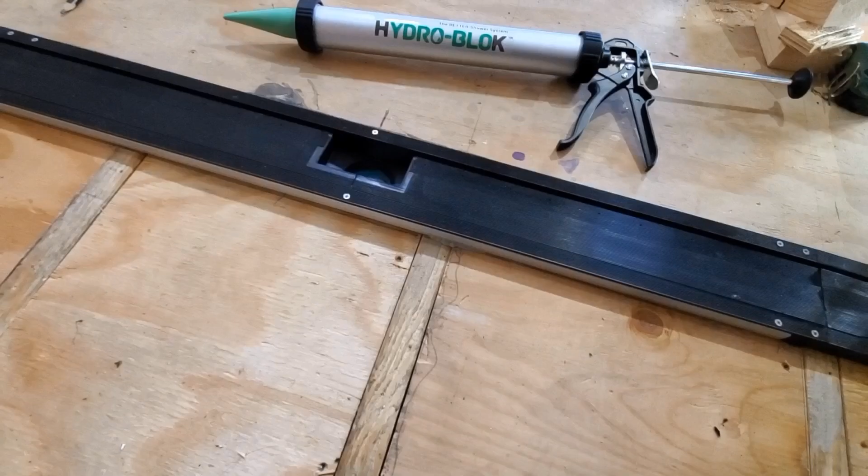So let's start by saying that we want to have a curbless shower, and that's why we want to get in touch with them, and they're going to send us all the parts and all the products that we need. Now let's start with the drain system. You're going to have these small foam covers that are going to help you for the drain system, and I'm going to go over that in a moment. But you have the main drain body right there, and obviously all the parts that will come with them.

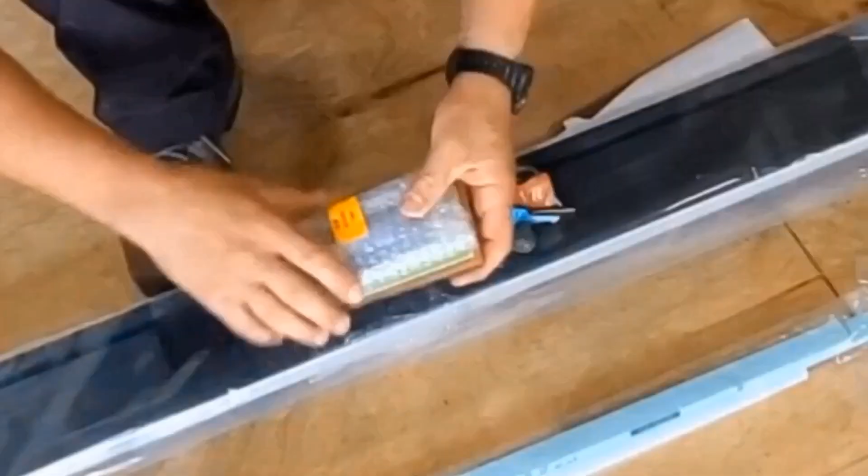Now I like to work on clean surfaces so I can keep track of all the parts that I have, like this puller over here. This is the drain cover puller, and it comes with a template. So these parts are going to be assembled later on the main drain body, and you have a template, so you can actually stick it on top of a tile, cut around, and it will fit perfectly inside that cover.

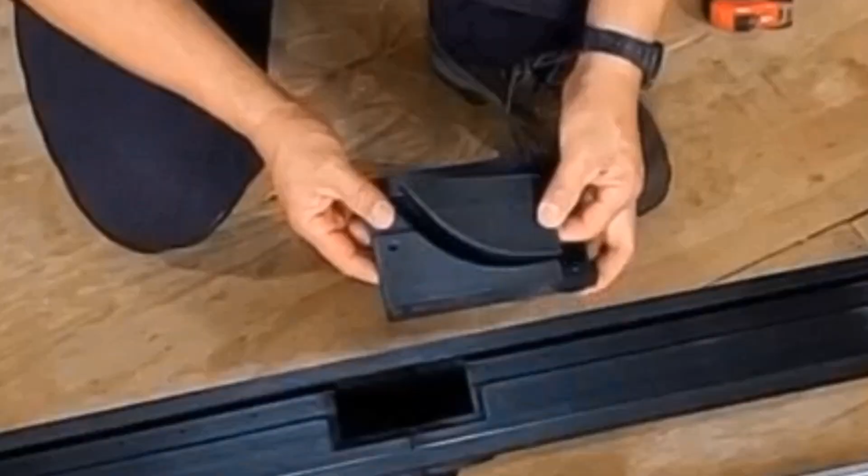You also have the end caps. You're going to have one on the right, one on the left. They are not identical. They are actually designed for each end, so you will follow the pattern, the grooves that you see on your drain. And that's an important part that we're going to go over and assemble later on.

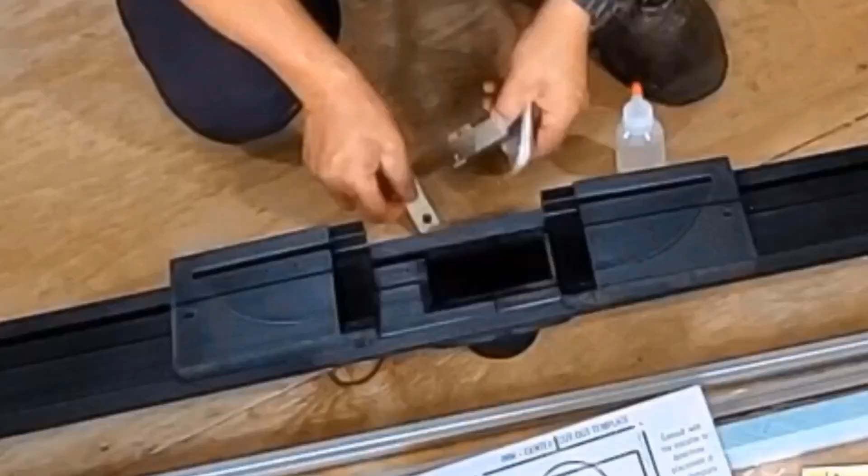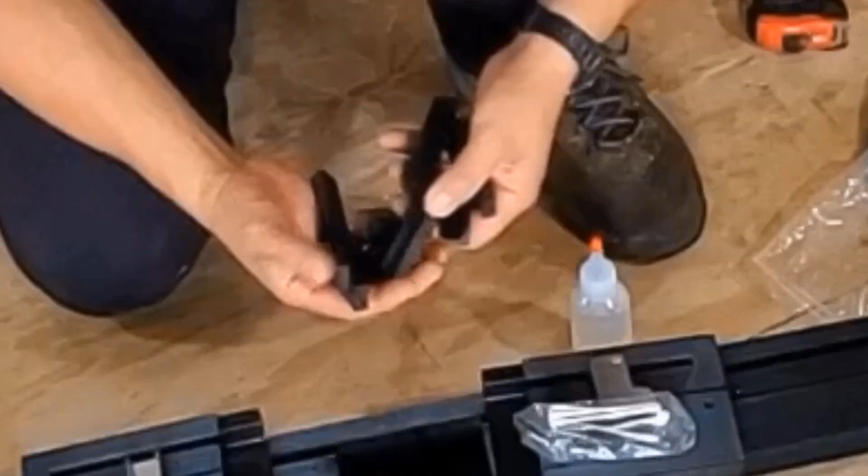You also have a small bottle where you can pour your ABS glue and these jigs. One jig will make a small perforation, the other one will help you countersink, with the countersink drill bit that they'll send you, the holes where you're going to install your screws and assemble the entire main drain body. Now these little inserts are labeled with letters A, B, C, and D. You're going to find the one that corresponds to the zone that you're going to cut later on. I'm going to show you step by step.

Because this drain is made to fit exactly where you have your opening, you're gonna have a lot of parts that are gonna help you along the way to protect the drain and add some support, like these aluminum rails that are gonna go on each side once you finish assembling your main drain body. You're also gonna realize that these parts are easy to access, so you're not gonna have a problem cleaning your drain.

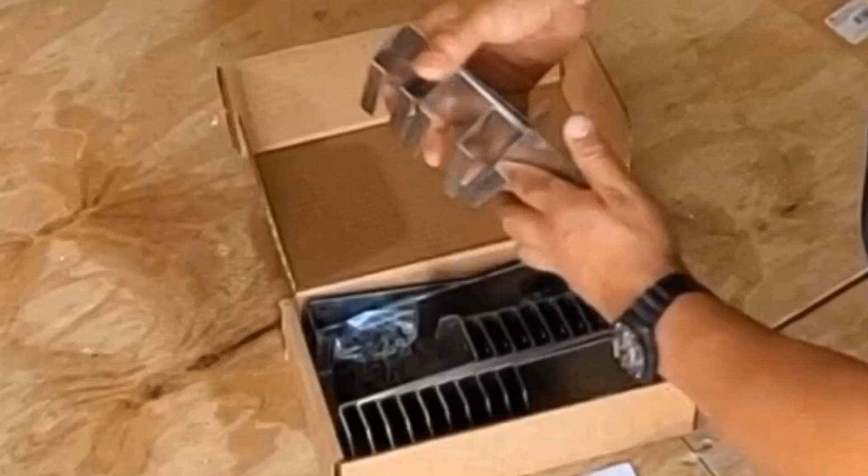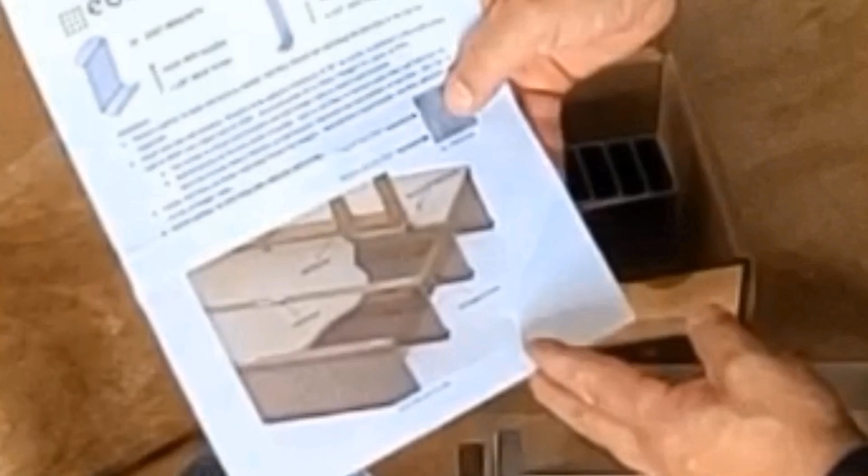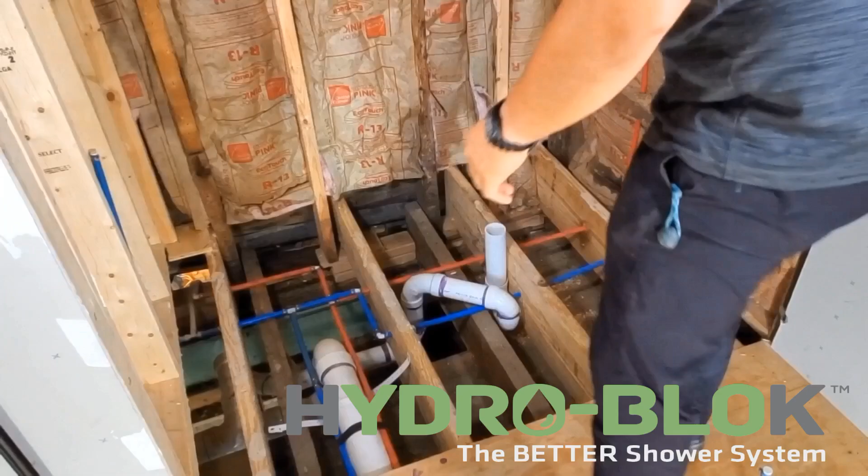Now, if you have a new engineered beam design house, these brackets will help you. They will send you this and it will help you lower your floor so you can achieve that transition-less shower. In my case, I have a conventional construction with joists, and what we're going to do is remove the area where we are going to work, and we are going to relocate the drain.

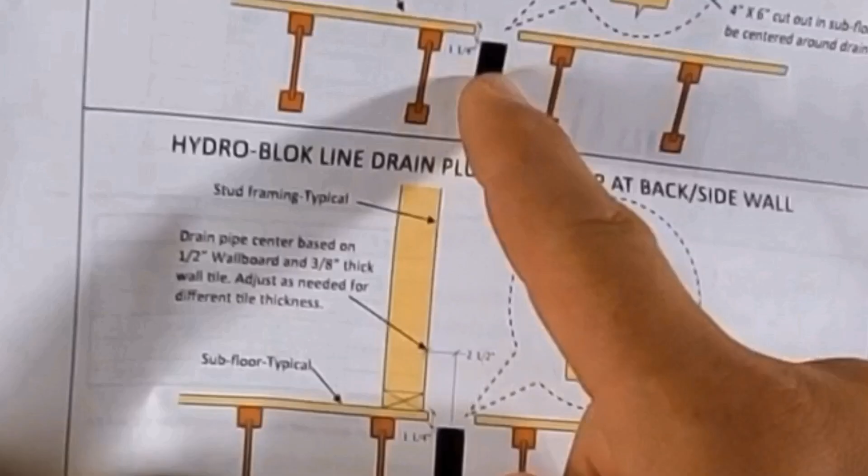See, before I had the idea of putting my drain right in the middle like normal, but you can follow these steps and the heights over here, about 1.25 inches. Whether you put it against the wall or right in the middle of your floor, it will guide you through all the steps that you need to take.

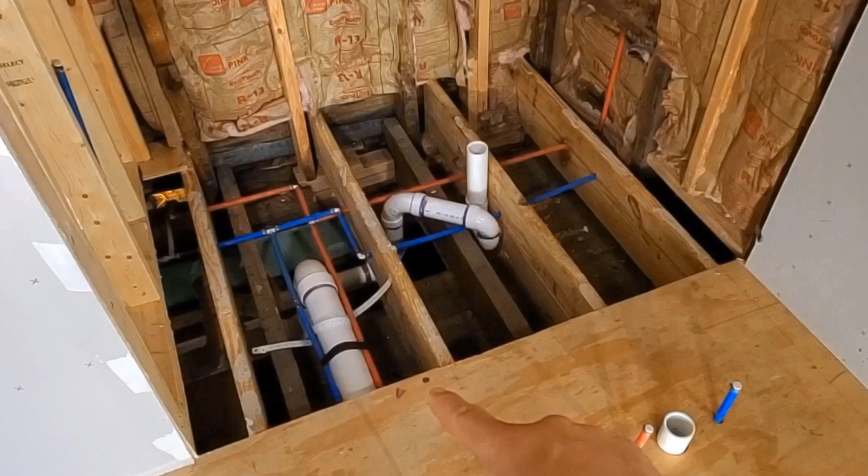So in my case, I'm going to move the drain from the center and put it towards the entrance of the shower. That means that I'm going to carefully remove the existing drain, follow the measurements that are here, use the template later on to set where my cutouts are going to be, and get ready to go.

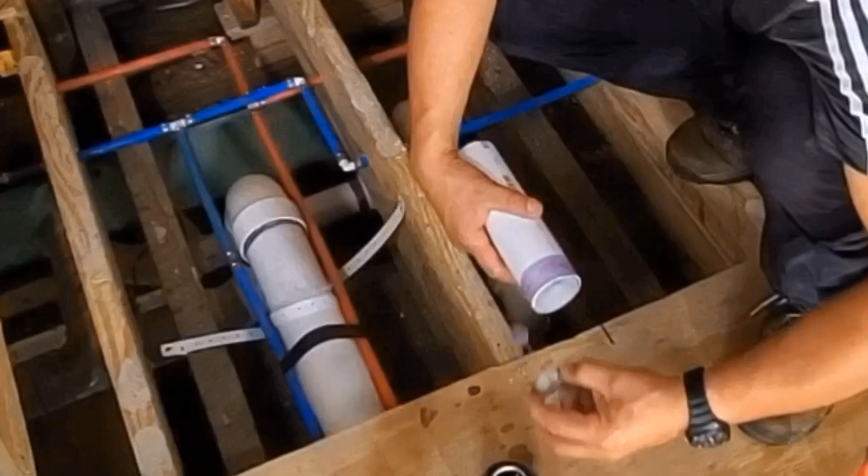Now remember that I have PVC over here and we have ABS on our drain, so we want to make sure that we have that transition, and I'm going to go over it in a second. So now, since I have a different height, I'm going to consider that when I install my pipe. I will be working flush with the joist, because now the joist height is going to be my final height. That means that I'm going to build up on the sides.

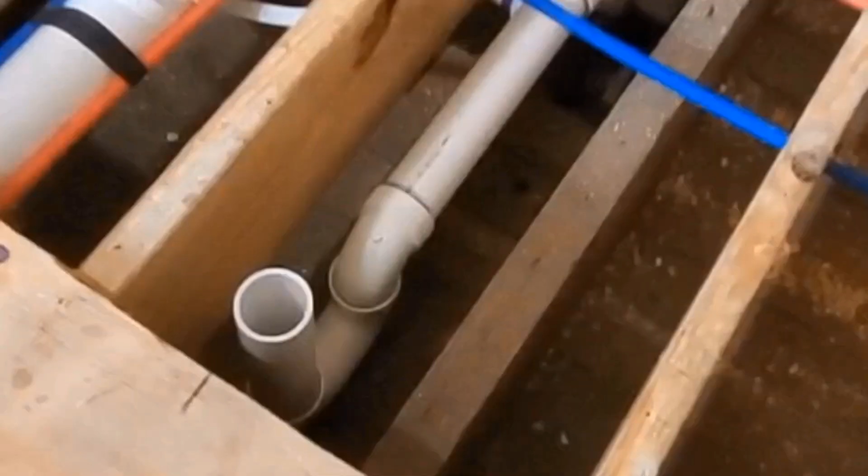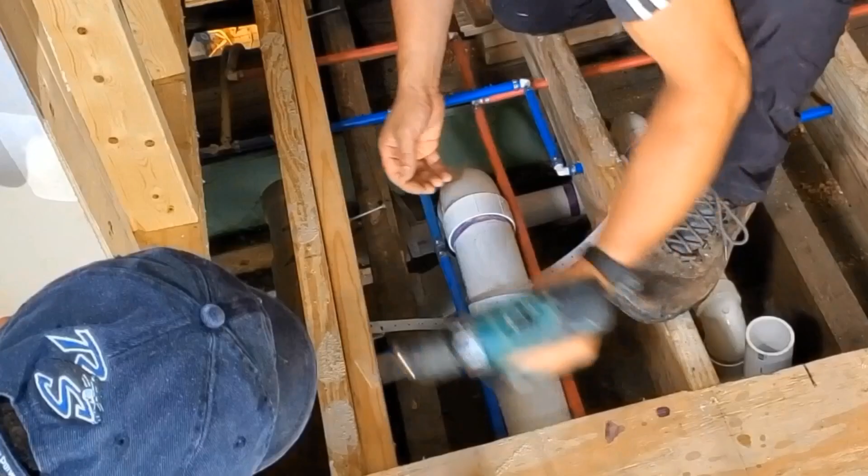I'm going to use some 2x2s, and I'm going to build a little bit of support on the sides so I can actually lower the plywood. And my plywood now, if you notice, I'm counting the thickness of the plywood, and I'm lowering it so it can be flush. And then I'm going to cut some strips of plywood, and I'm just going to run the plywood parallel with the joist right there. So it's a simple job to do, and now is the first cut.

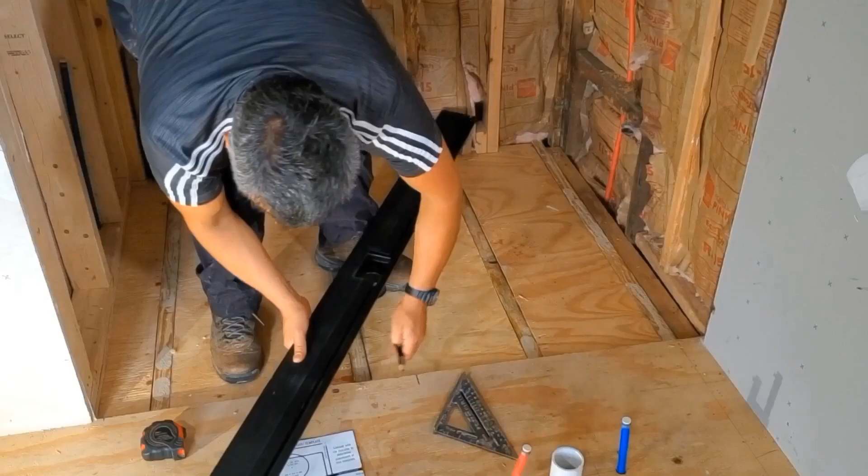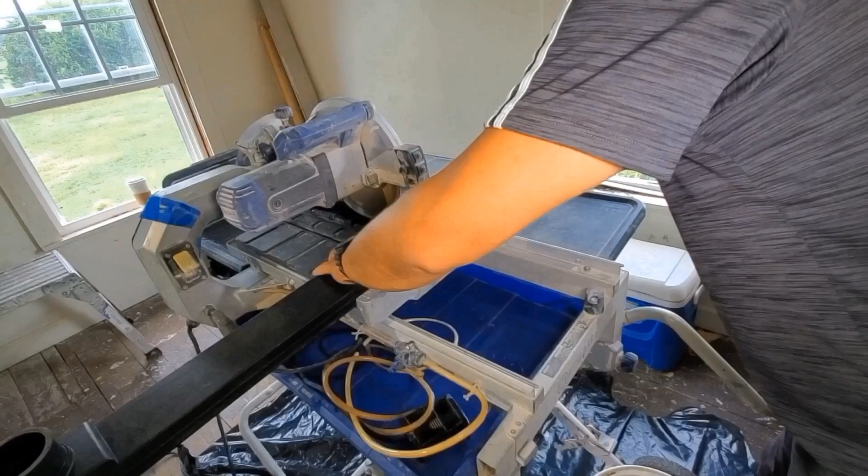The rough cut: you're going to measure and make sure that you cut about 1/4 inch away from the wall. You don't have to be extremely precise in that case, but you want to make sure that you are straight when you're making your cuts. And for this, I encourage you to use your wet saw. You want to make sure that your cuts are as straight as possible. And by using the wet saw, I'm not going to overheat the material, and it's going to be a nice, flush and smooth cut.

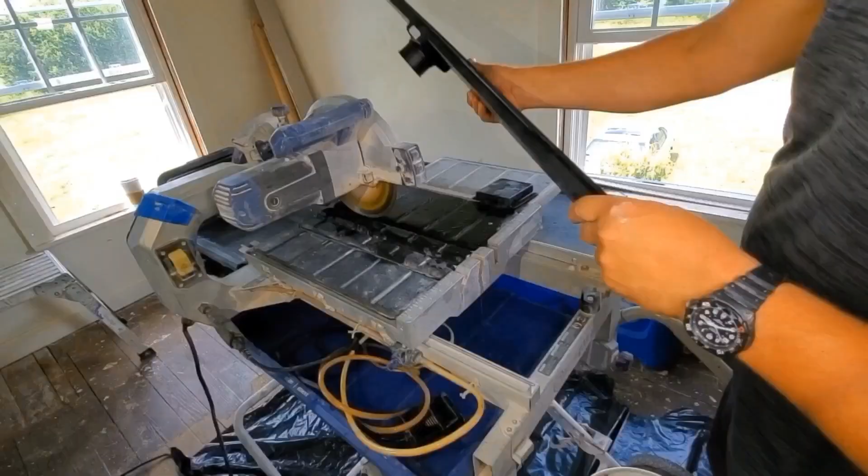Now you're going to have a little bit of leftovers from the cuts, and you want to make sure that you remove them really well. Remember, this is the first of the 2 cuts that you're going to do to your main drain body. Later on, you're going to do the final cut, and I'm going to show you how it is. Now, the template is going to show me exactly where it goes, and that small line is going to be the edge of the plywood, and that is the one that I'm going to put against the other height.

And with a small 1/8 of an inch drill bit, I'm going to make some marks so I can make that rectangular pattern over there, in my case this small square, so I can cut it. I'm going to use my regular oscillating saw to make the cuts over here and make sure that I have the area nice and clean.

Obviously, I love to dry fit everything that I do, because once you glue things, it's really hard to undo all that stuff, especially with PVC or ABS material. So you want to make sure that you dry fit all these things, make sure that everything is nice and straight, that it is the right height, and then you move forward from that point. If you need to do any adjustment, do it right now.

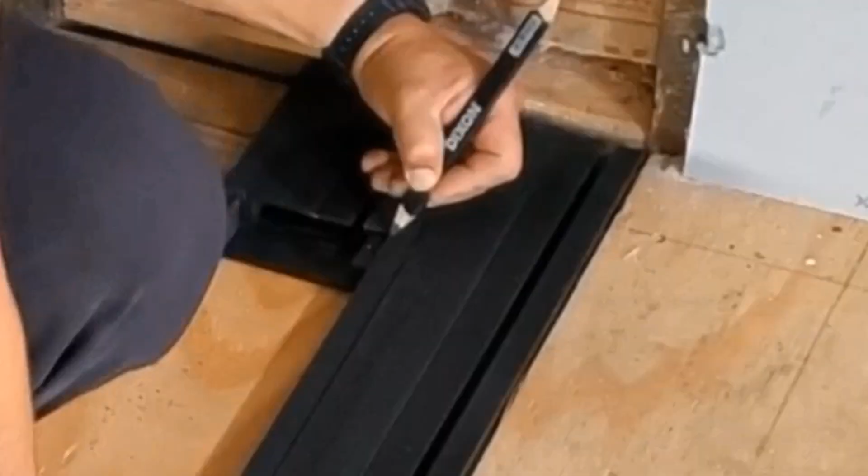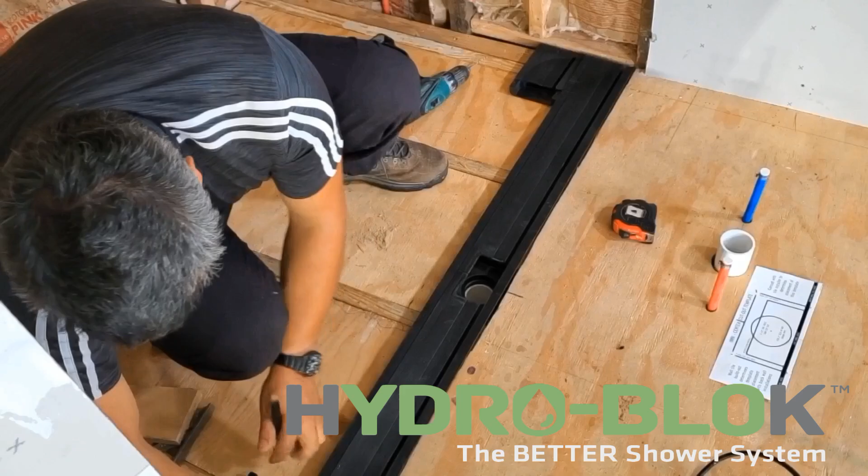Now you're going to do the second cut. In the second cut, you're going to be about 1/8 of an inch away from the walls. You're going to cut this carefully, and you're going to measure exactly where the upper part of your end cap starts. That means that whenever you're making that little line, you want to mark exactly right there. You don't want to cut to the size of your end cap. You want to make sure that you cut with the top of the end cap.

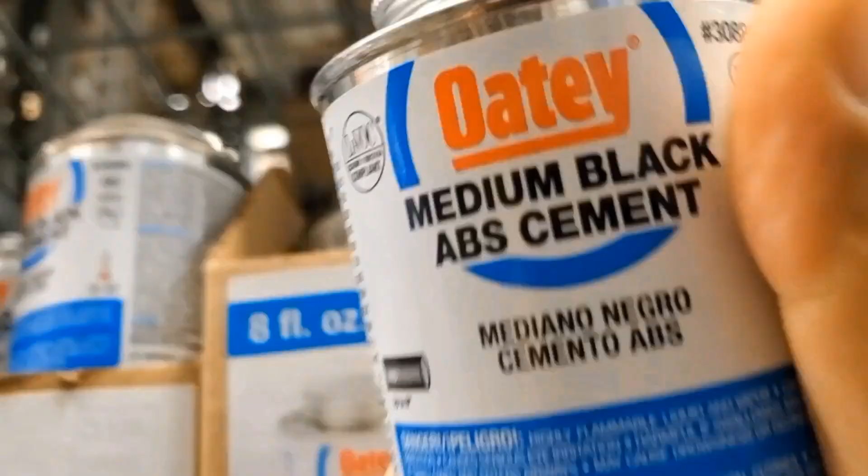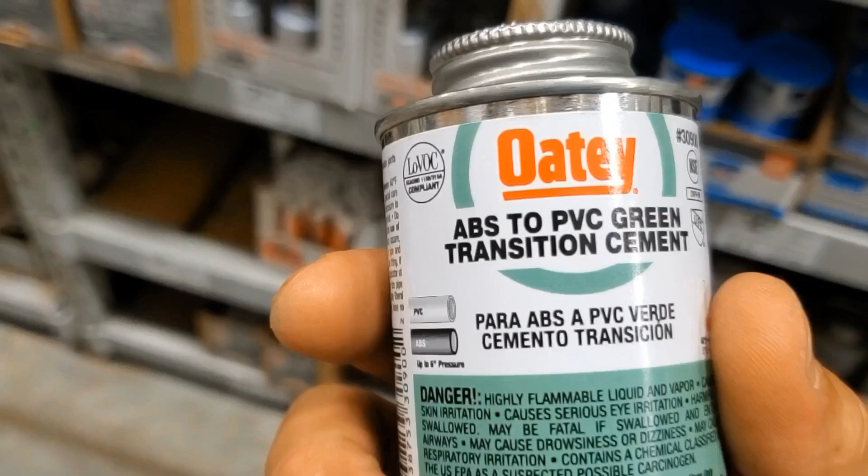Now, let's go find the ABS glue. That's the one that you're going to use to put all your drain body together. And in my case, I'm going to use this transitional glue because I'm going to go from ABS to PVC. It's important because later on, if the parts start malfunctioning, it's because the right adhesive was not used, and that's why I encourage you to go and find these glues. If you have ABS to ABS, or black pipe to black pipe, it's not a problem.

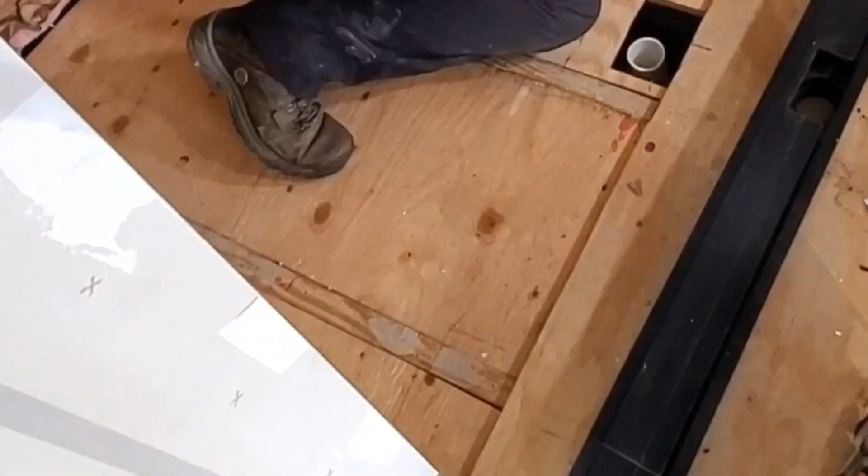So now, like I said, we want to dry fit all these pieces and make sure that we do the second cutout, and this second cutout is at the end. You're going to find that there are 2 sections on the end caps that need to be recessed about 1/8 of an inch or 3/16 of an inch. So you want to make those little cutouts and prepare that area so it can be as flush as possible.

Now let's work with the jigs. The jigs are gonna work as follows. You're gonna use the first jig to make sure that you have the first perforation, and the second jig, so that will be a recess or countersink.

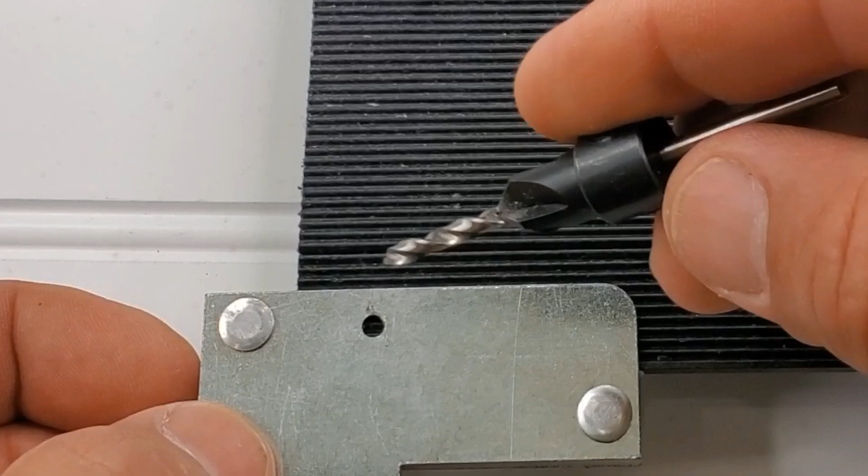So let's do the first cut by just making that a small little hole, and later on we're gonna switch to the other jig that we have, and we're gonna make that perforation so we can have now a countersink hole that once you install your screw is gonna be nice and flush. That is the important thing. You're gonna have 2 of these holes made on each end of the main drain body. That is important for you to work with.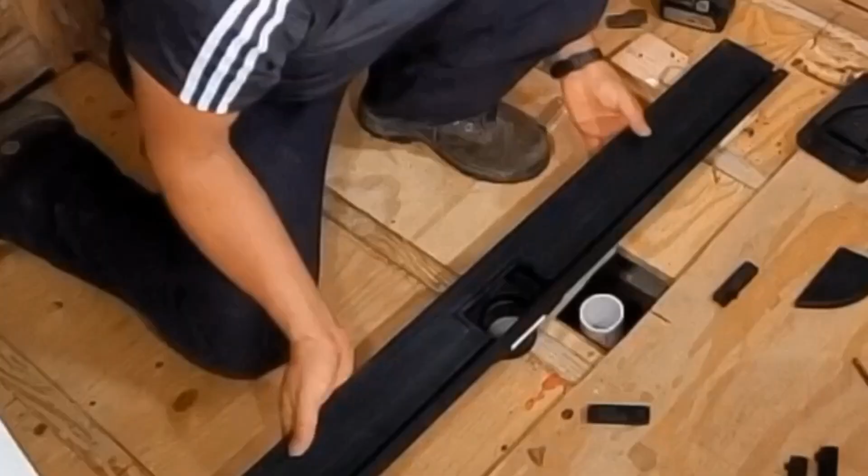Now remember that you have these zones, and you want to match the zones, the sections under your main drain body with the 2 inserts that are going to help you to support the main drain body. That is a crucial part of your installation, because you're going to have 8 pieces. You want to match the one that corresponds to that. Now, I don't want you to have any confusion in the way you're going to assemble your end caps.

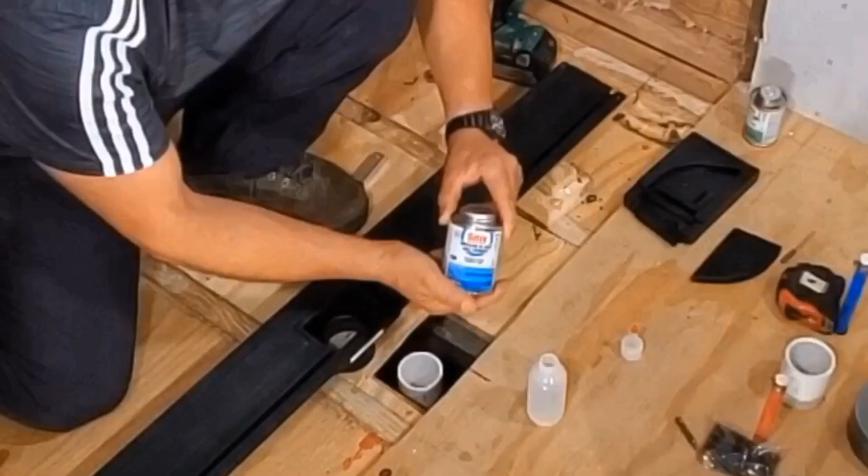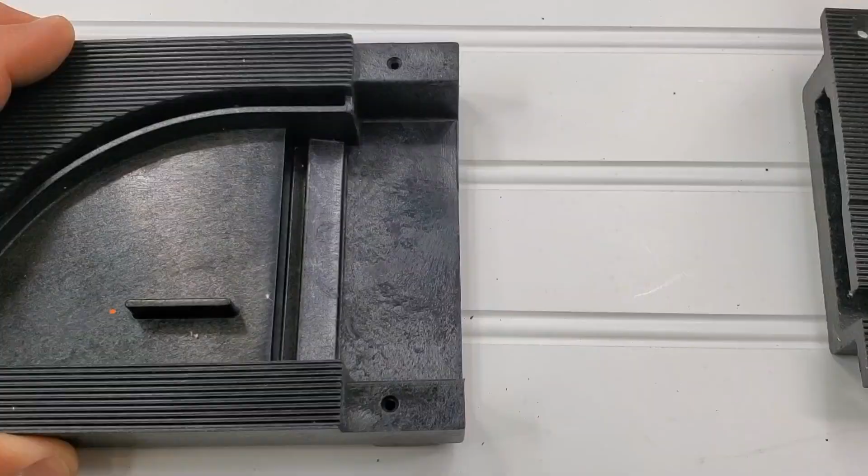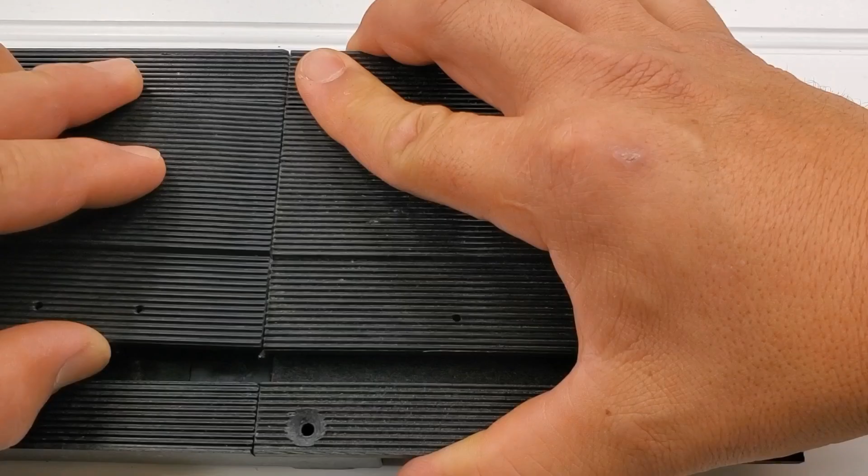Let's start again. You're going to use a little bit of ABS glue inside the little bottle that you have there, and the steps that you want to take to assemble these are simple but important. You want to go ahead and put the little insert there. Now, if it doesn't fit because the little piece that is there is out, you want to go ahead and cut it with something that's going to cut it nice and smooth. You're going to put it back there, and now you can assemble your piece really well. The screws and the holes on the main drain body and the end cap are going to line up really well. So let's have that in consideration.

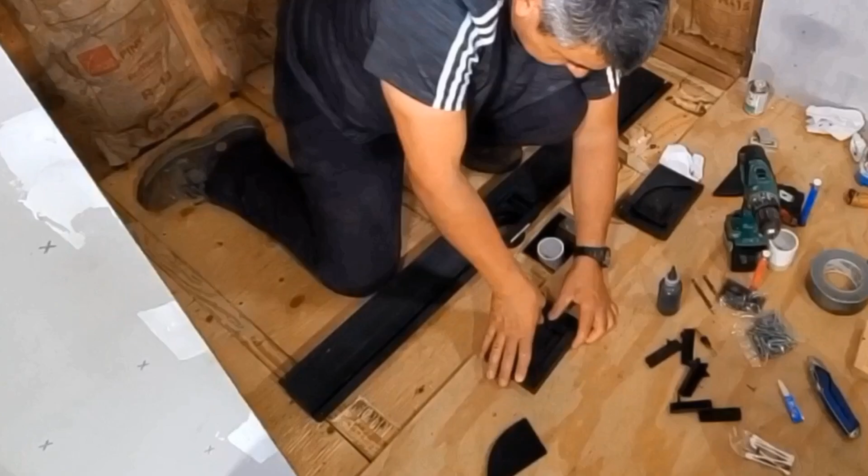Apply a little bit of the ABS glue on those 2 grooves that you're going to find there, and that's where you're going to put your little support. In my case, I didn't have to cut anything on it because it was nice and smooth. It went inside really well, so that is an important thing for you to remember, that you install it that way. Clean the excess of your ABS glue because this thing will solidify really quick, so you want to make sure you have something to clean with, and do exactly the same thing on the other side. You want to install the parts correctly on both sides, and you want to have them ready for the installation on the main drain body.

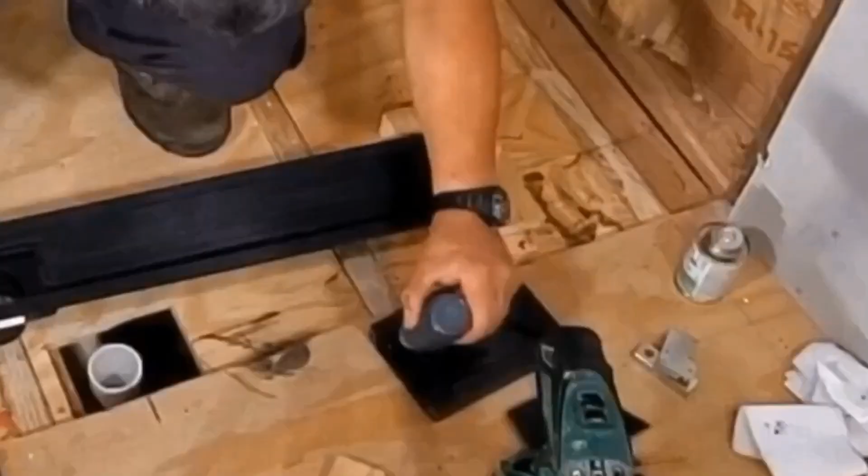Don't put the end covers yet, the top covers yet, those small little sections there. You want to make sure that you assemble that part really well by applying another nice bit of ABS glue right there on the end cap, and you're gonna seat the main drain body on a piece of block, so it will be nice and straight. You don't want to screw these things in a slanted way diagonally, because you want to make sure that you have a nice complete seal.

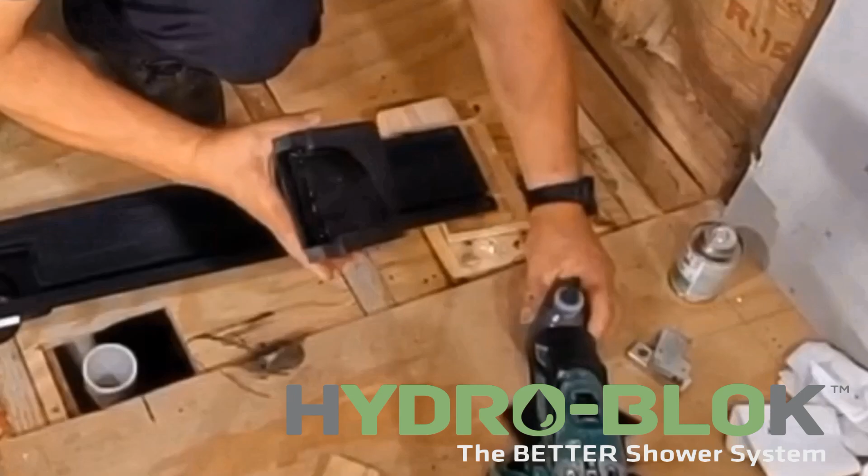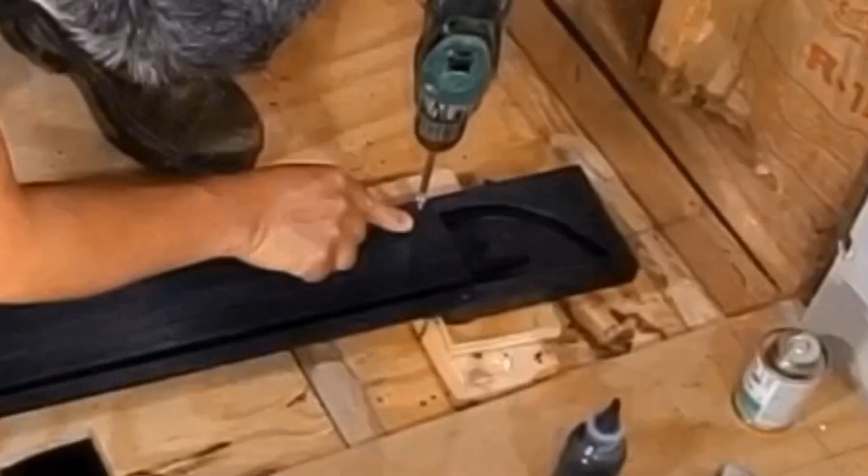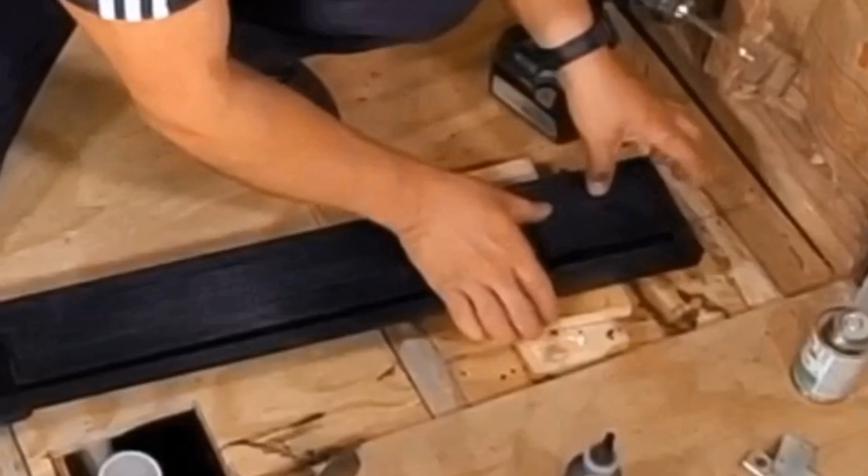And once you finish building this thing, you can actually put a plug in the middle and you can test your drain. So make sure that you don't have leaks around, make sure that everything is nice and sealed. In fact, you want to go under it and apply another nice amount of ABS glue under it, so you can have the entire thing really sealed. So once you finish installing those two screws, you want to go ahead and put those end cap covers, and they're going to be sealed really well.

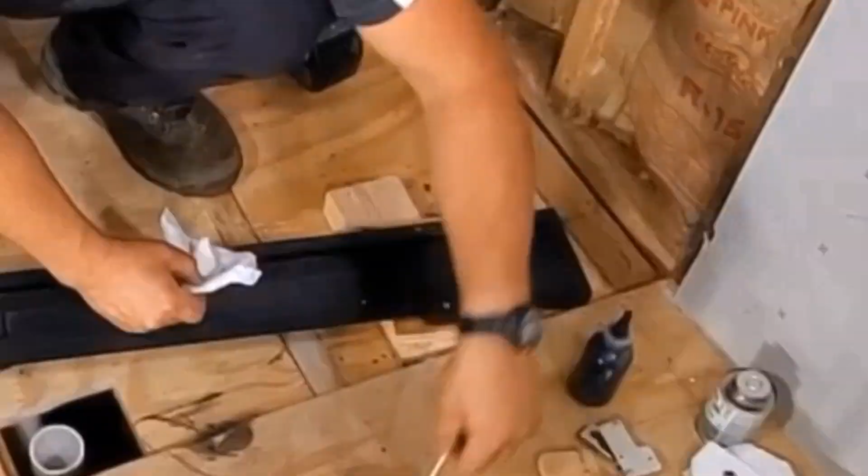And you're going to use the little cotton swabs. If you have some excess inside, you want to make sure that you clean all that. You don't want to have excess glue inside your drain system. That is an important thing. Obviously, you're going to do exactly the same thing on the other side of the drain. You want to make sure that you apply a nice bit of ABS glue under as well, so you will seal this really well. Again, remember that you want to have a nice surface before you continue installing anything on your main drain body.

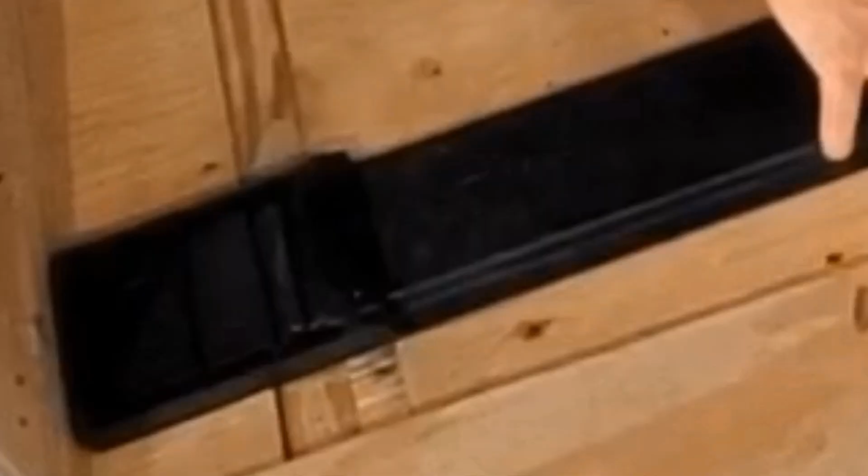And now that everything is assembled, we want to go ahead and put the rail support. These aluminum rails, the small one is for the slot side, it's actually marked. That means that it goes on the outside of your main drain body, and the bigger one is going to go in the back.

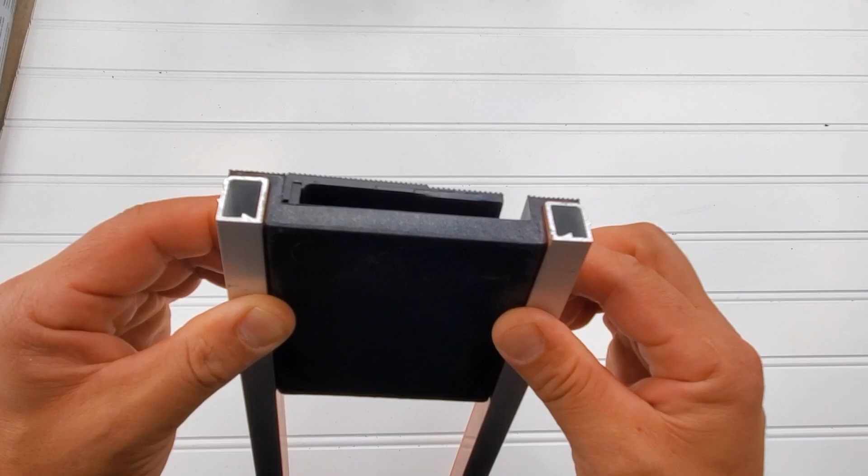So you can actually see here that the small one goes where the groove where the water goes in goes, right? So they both have glue in two of the sides, and you want to go ahead and use those two sections that have the glue to attach it to both of the edges, the L edge of both sides of the main drain body.

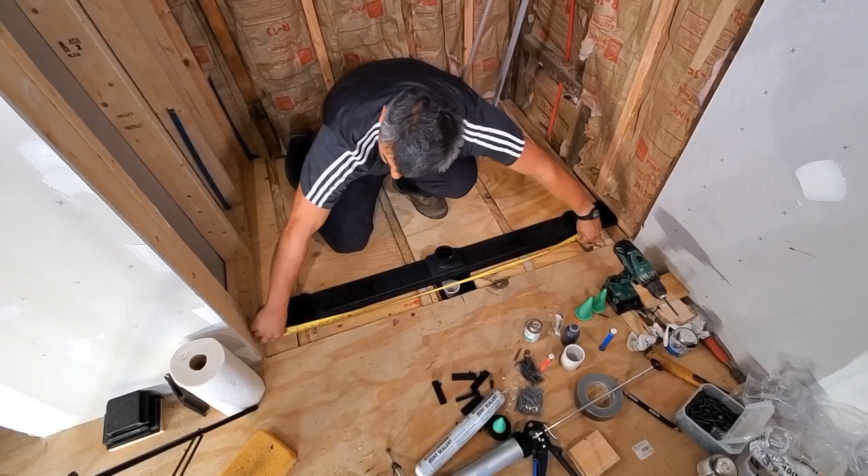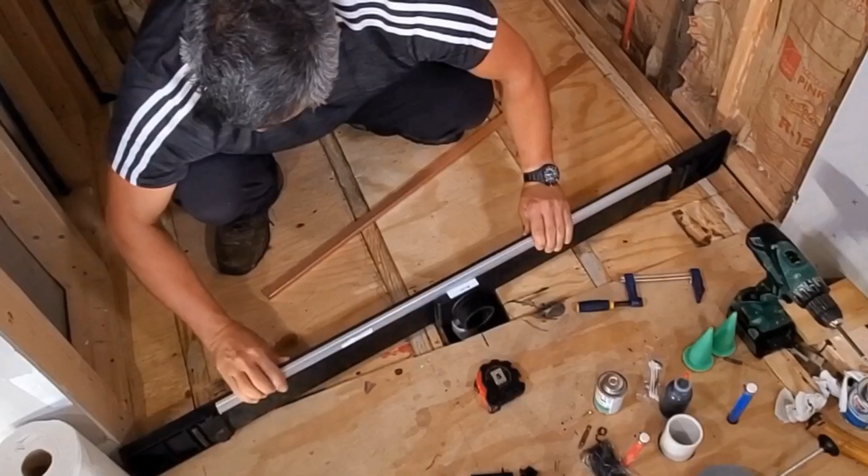You want to go ahead and measure really well. They both should measure the same distance, and go ahead and cut it with your grinder. You want to make sure that you cut as nice as possible, or your wet saw if you have the right blade. So go ahead and apply a good amount of pressure. Make sure that it's nice and sealed. Install it really well, because that glue is really strong.

Now, just as we did with the end caps, we want to go ahead and make 3 perforations in each and recess those perforations. Make sure that you put 3 screws that are nice and flush. So we're going to go ahead and install it really well. Some people may use some clamps to clamp it down if they don't have the strength to install it, but as you see, you don't need to do that. You can actually apply some pressure and it will be nice and straight.

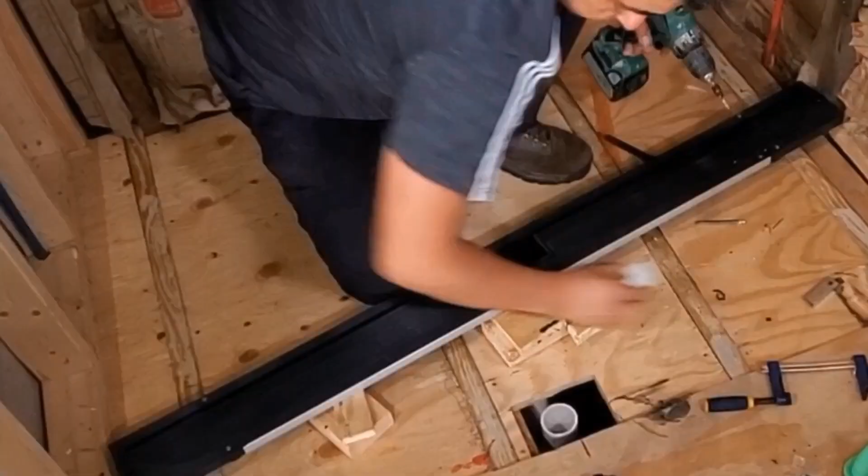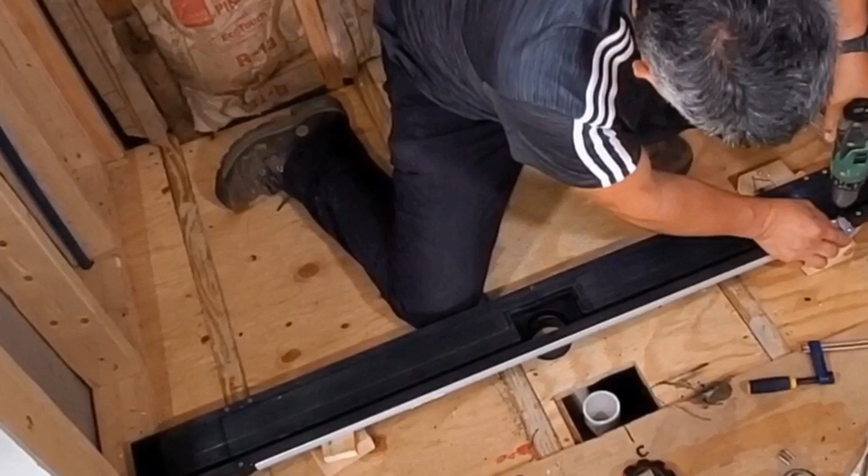But it is really important for you to make those 6 perforations, 3 on each side of your main drain body, to provide that support that your finished product will need. So that is a crucial part of your installation, and make sure that you use your jigs correctly and apply the pressure on top of a block, because that is something that you definitely don't want to miss. You want to make sure that you apply some pressure, including those little wood blocks or something that will give you that support underneath.

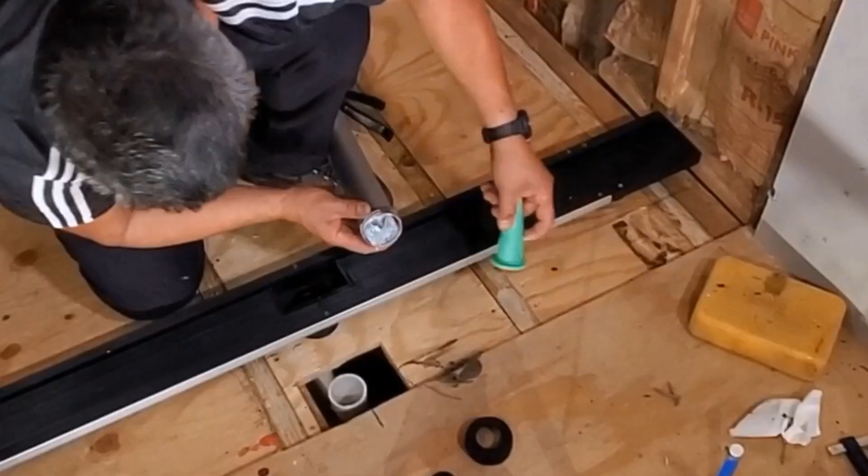Now, the joint sealant that you have here is exclusively from HYDRO-BLOK, and you're going to use that to do the final part of our installation, which is attaching, fastening, gluing our main drain body to the surface that is there. And that's why it's extremely important for you to make sure that everything is nice and clean. So keeping the working area clean is crucial for your materials to adhere properly to the floor.

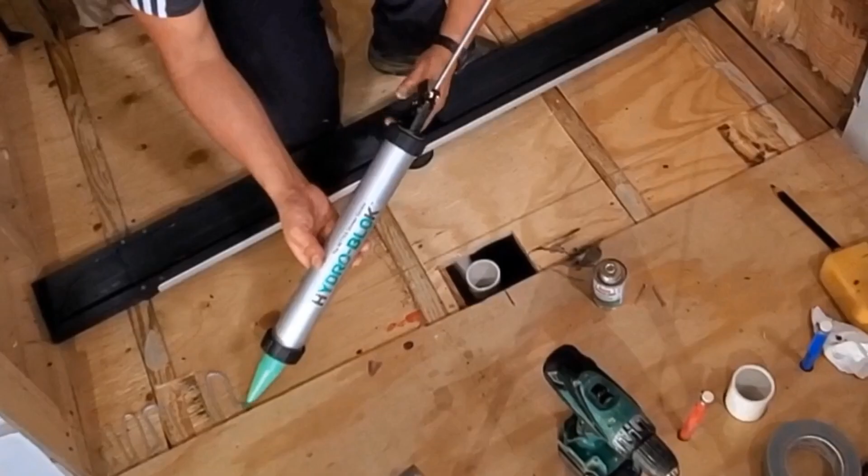So that is crucial, and you're gonna go ahead and apply a heavy bit of the joint sealant from HYDRO-BLOK, and just kind of avoid the little areas where you made the recesses for the end caps; you don't want to put too much material in there. You want to make sure that it's nice and flush. Again, we want to dry fit all these things before we do that. We want to make sure that we distribute that glue evenly.

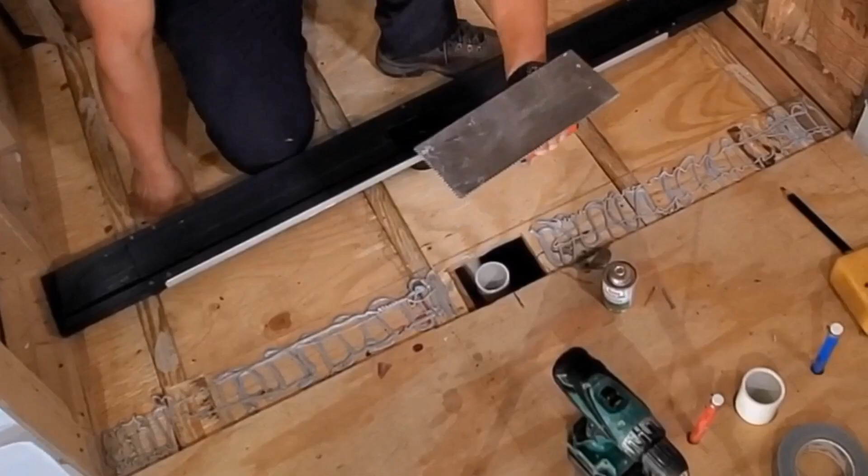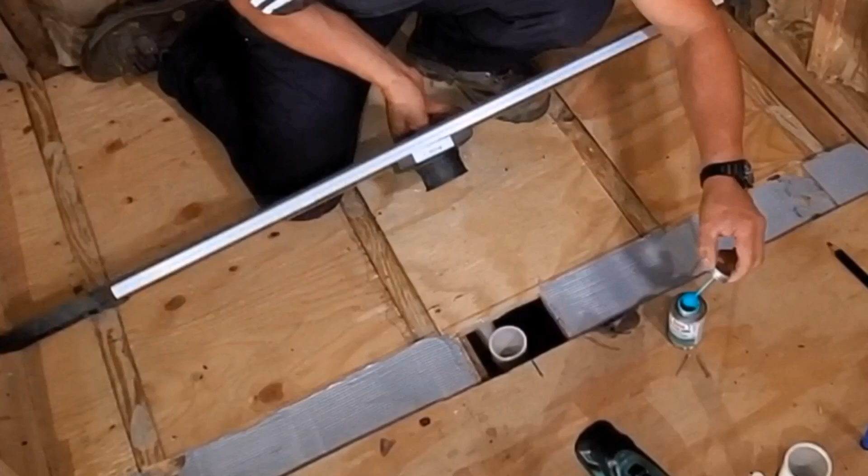So I'm using this triangular 1/8 of an inch trowel, and I encourage you to use this one and no more than 1/4 of an inch trowel to apply this material. Then right immediately after that, you want to go ahead and install your main drain body, meaning the entire drain. Remember that transition glue? This transition glue is going to be used right now from the ABS to our PVC. So it's crucial for you to use this transition glue if you're going to apply it like that.

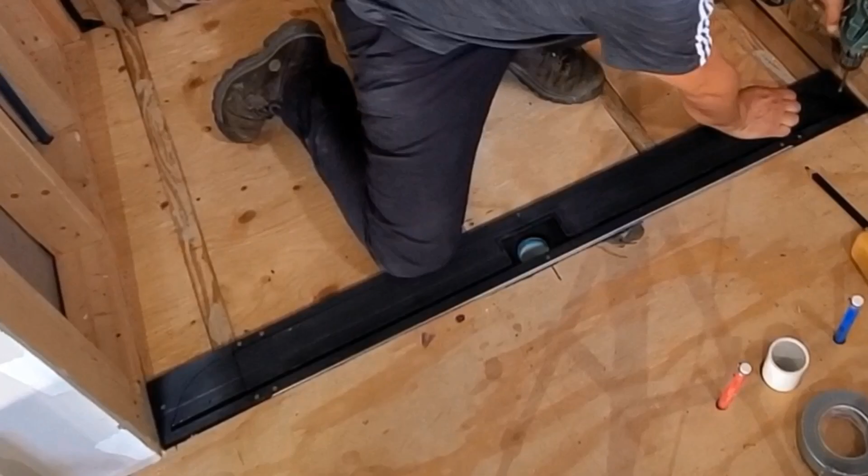Go ahead and apply some good pressure, and you have 2 holes at the end of the end caps. You want to go ahead and install those 2 screws really well, and you are set. This is the part that you want at the end. You want to make sure that it's nice and straight, and that it is precise there on your opening, and that it is ready for your shower pan, which I'm going to show you in the next video. So I'm really pleased with this product.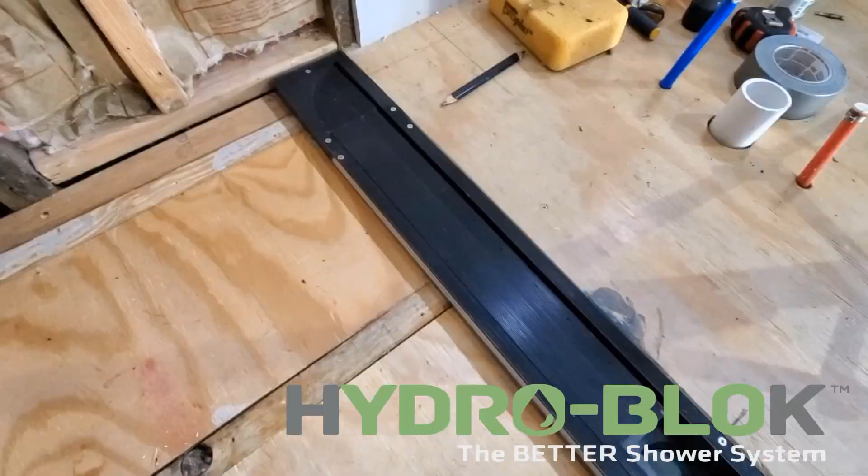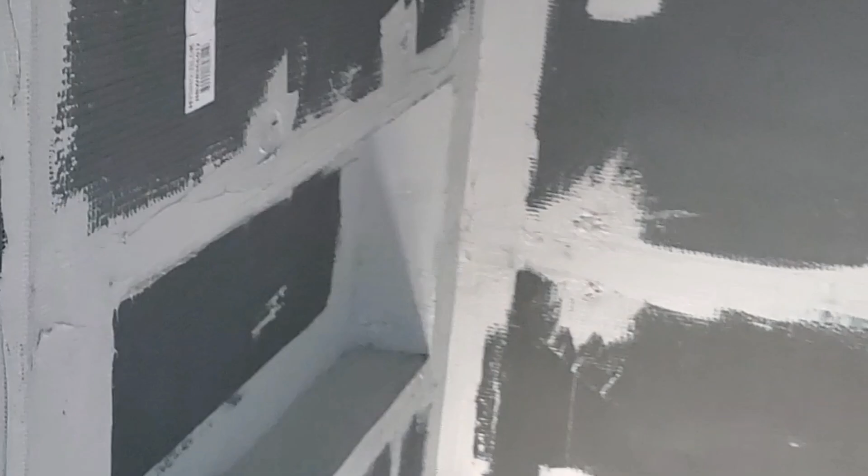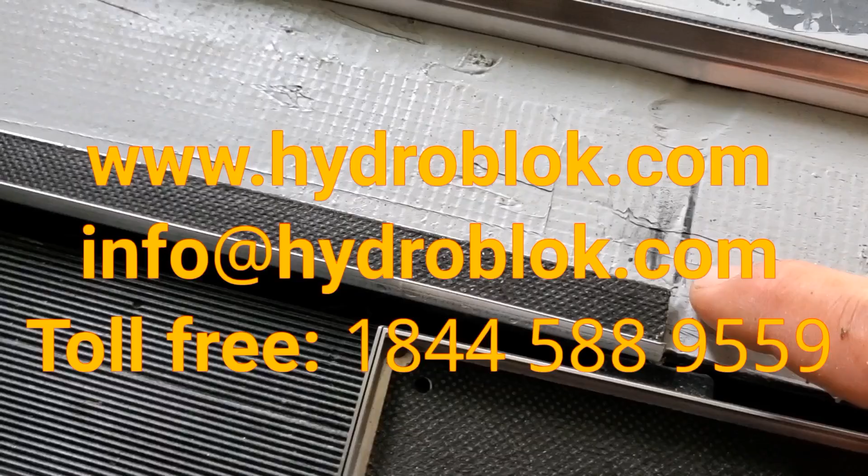HYDRO-BLOK is doing a really nice job creating these components for us builders to work with. And again, I encourage you to go ahead and ask questions. Make sure that you ask and you follow all the instructions that are there. Send them an email, get in touch with them over the phone, and now you have a whole bunch of possibilities, because this opens a whole bunch of different designs that I was limited before to do because I didn't have the product available.